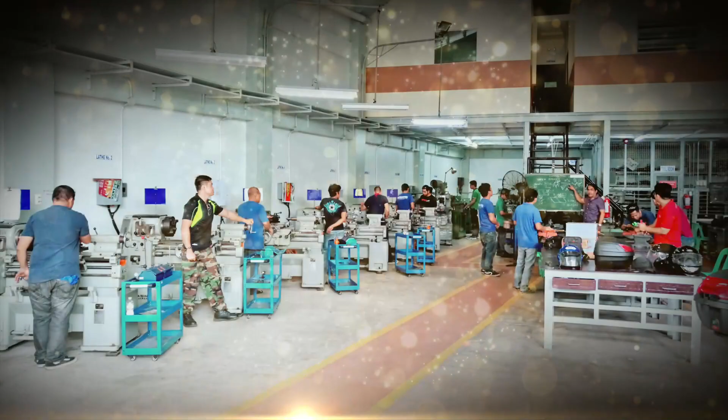I'm going to show you how to use the Hexagon arm, of course with the help of the trainer from Hill Metrology, Philippines.

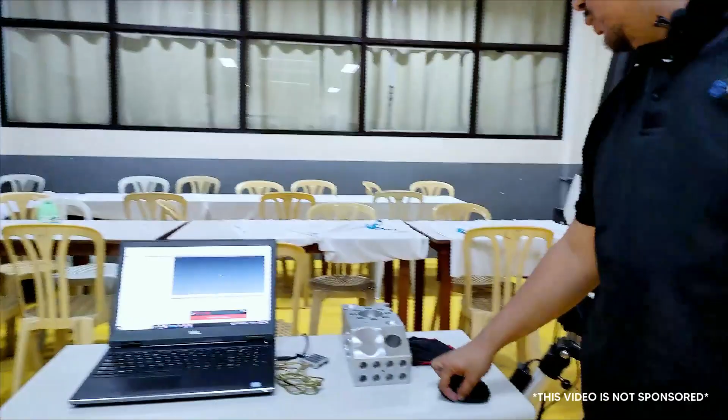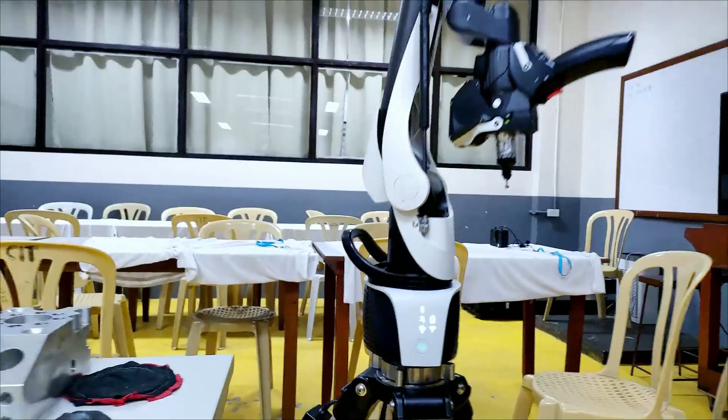Okay, so the first step to measure the specimen here is to open, long press, and then connect the portable arm to our software, which is PolyWorks.

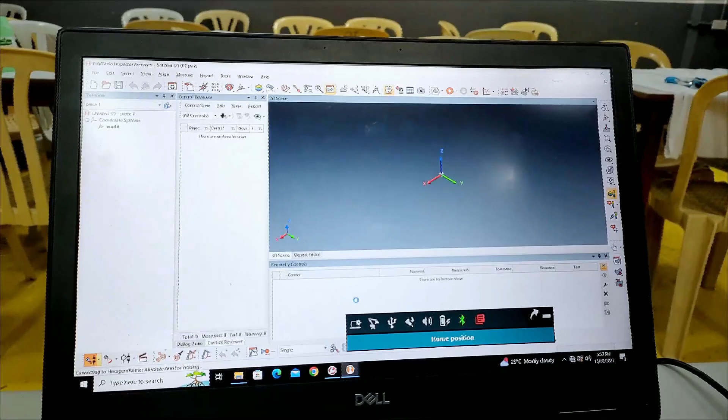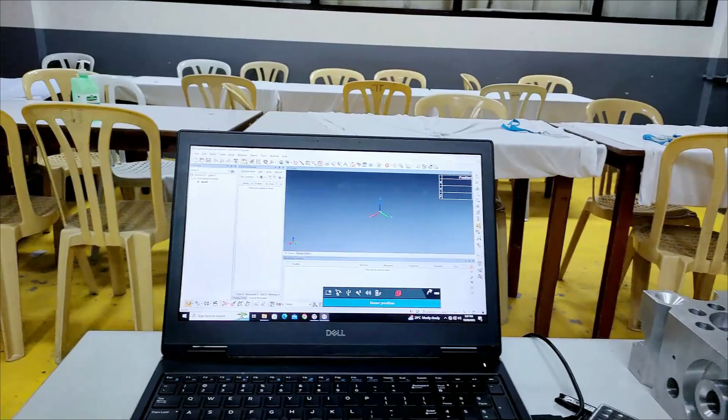Okay, after connecting the arm to our PolyWorks, we need to download and import the CAD software. This is the CAD of our workpiece.

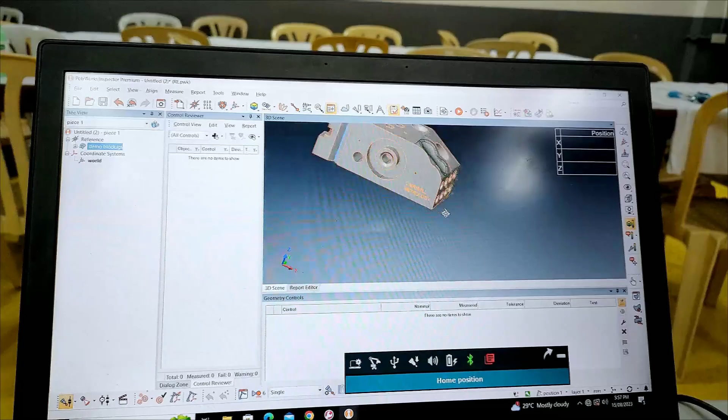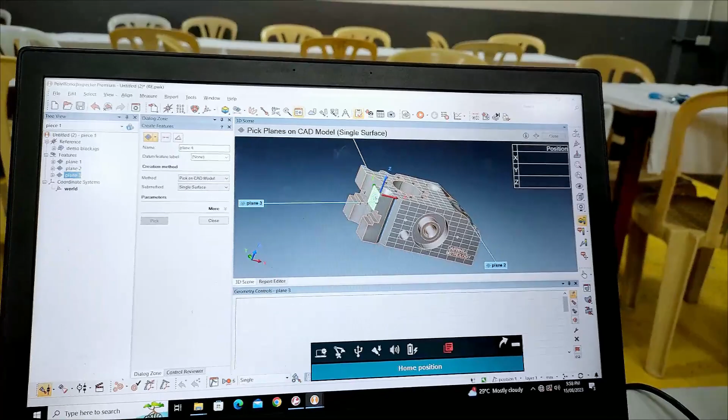After importing the CAD, we need to extract its alignment features, which is 3 planes. This is plane 1, plane 2, and plane 3. After that, these are all the nominal values of the plane.

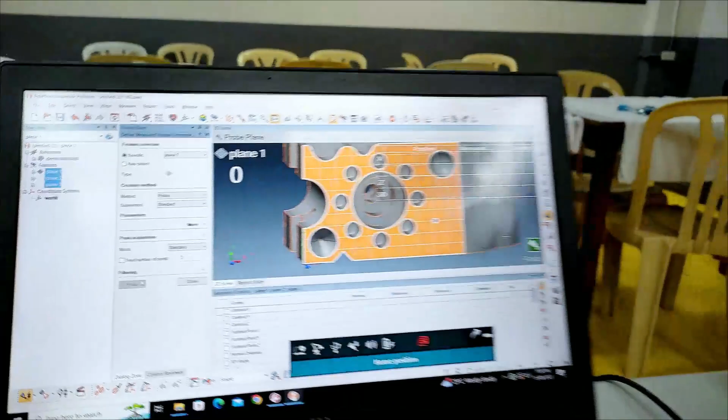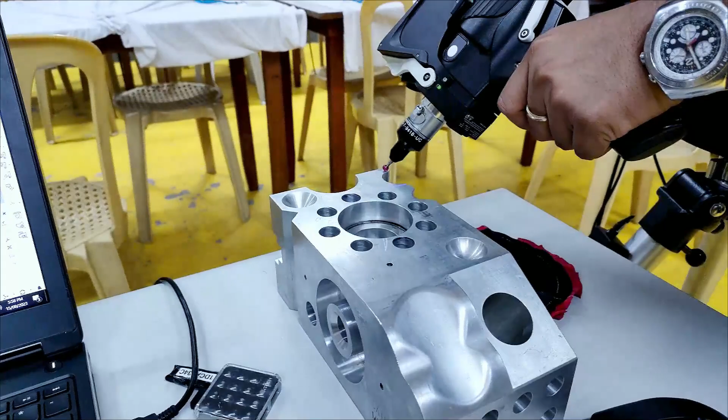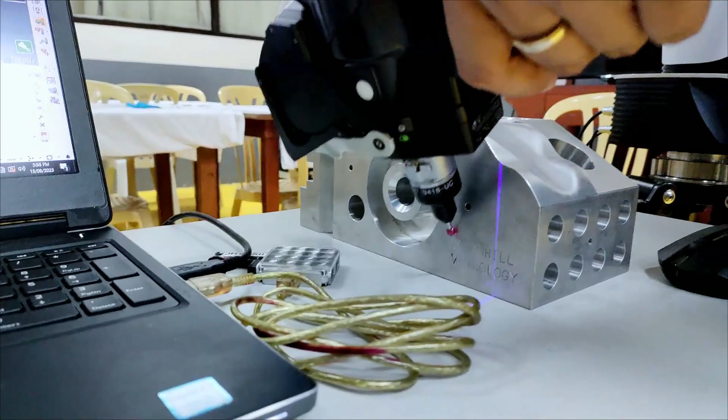We need to input the measured value. Our method will be probing, so I will start probing. This will be point 1, plane 1. And for plane 2, and then this is plane 3.

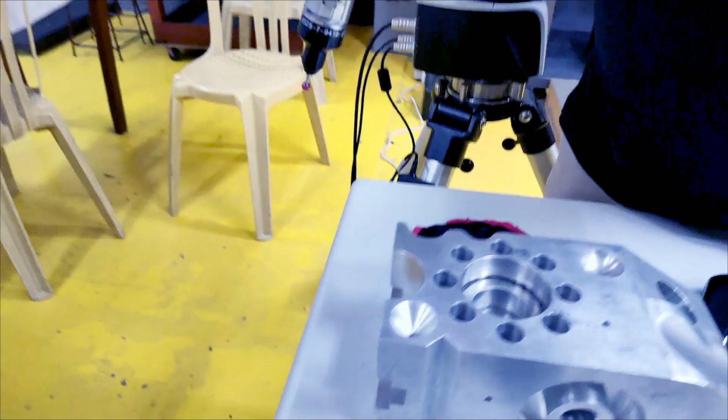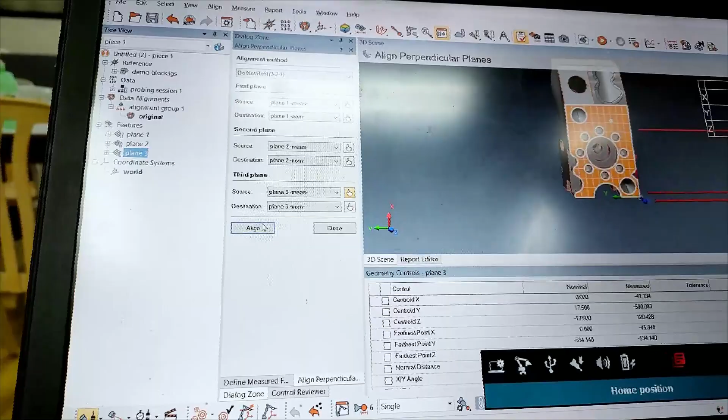Okay, so after that, we need to align the nominal and the measured. So this is the alignment. We just need to check the measured. Okay, so as you can see, our nominal and measured are already aligned.

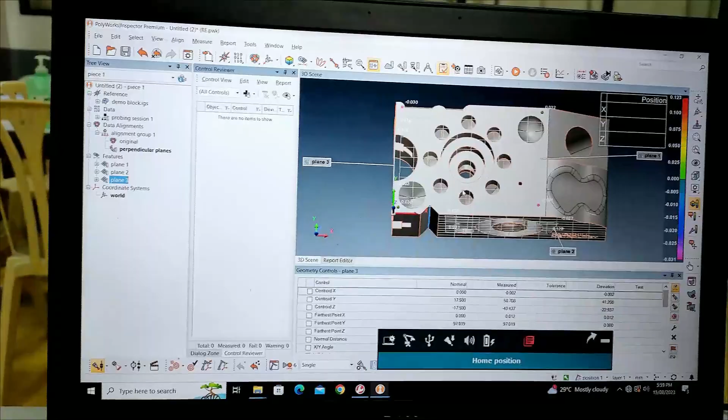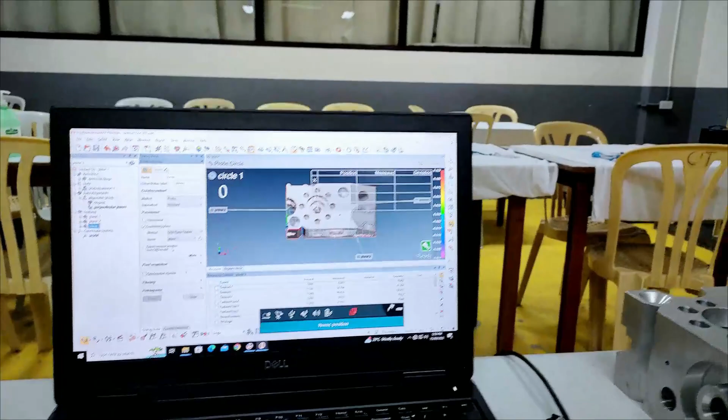After that, we can continue the measurement. So let's say we need to measure this circle. We need to call out for the circle by probing. So I will probe. Okay, so this is the first point for the circle.

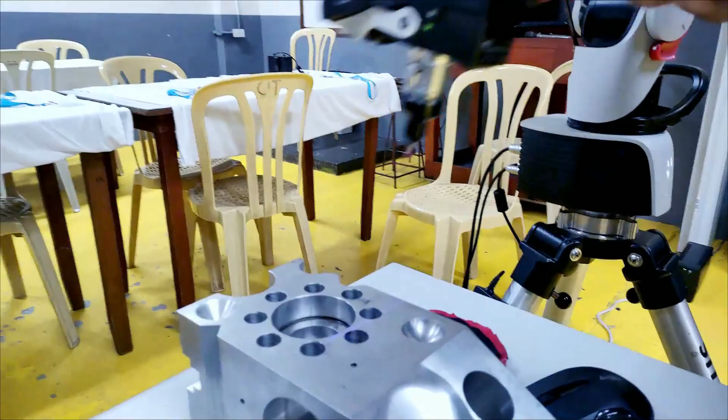Okay, so as you can see on our data, here are the measured values: the X, Y, Z, and the diameter. So if you want to input the nominal, just extract the nominal for the circle.

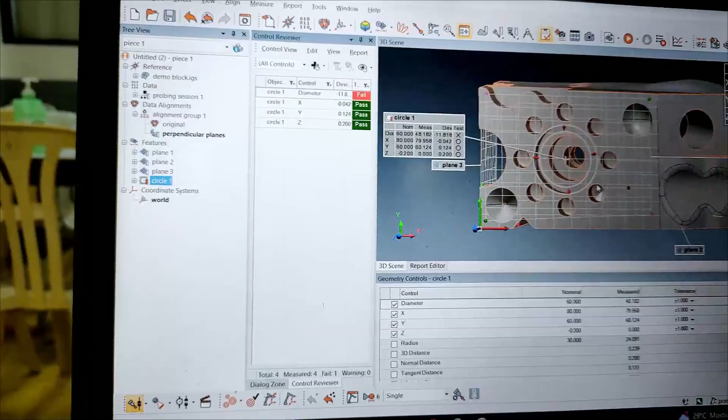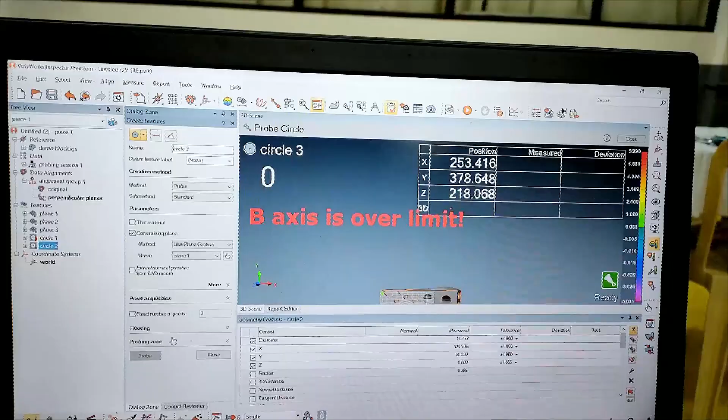Okay, and so if you want to measure another one, let's say another circle here, we do circle again. And then we can extract again the nominal.

So that is how you can measure the workpiece according to our portable arm.